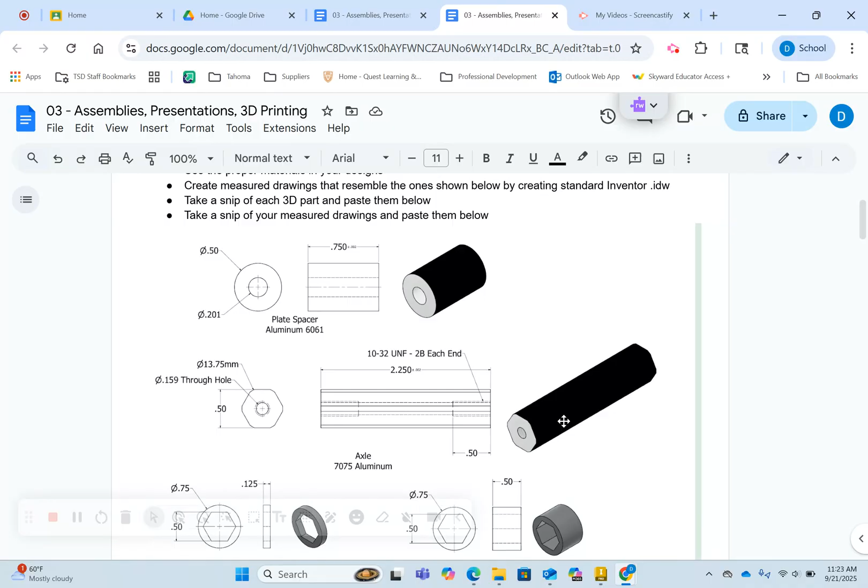Going to Inventor, we're going to go File, New, create a standard Inventor part, and go Create. First thing I'm going to do is make a sketch and then put a hexagon on that. So under the rectangle, dropping down, you can see the polygon. The default polygon that it gives you is a 6-sided polygon, which is a hexagon.

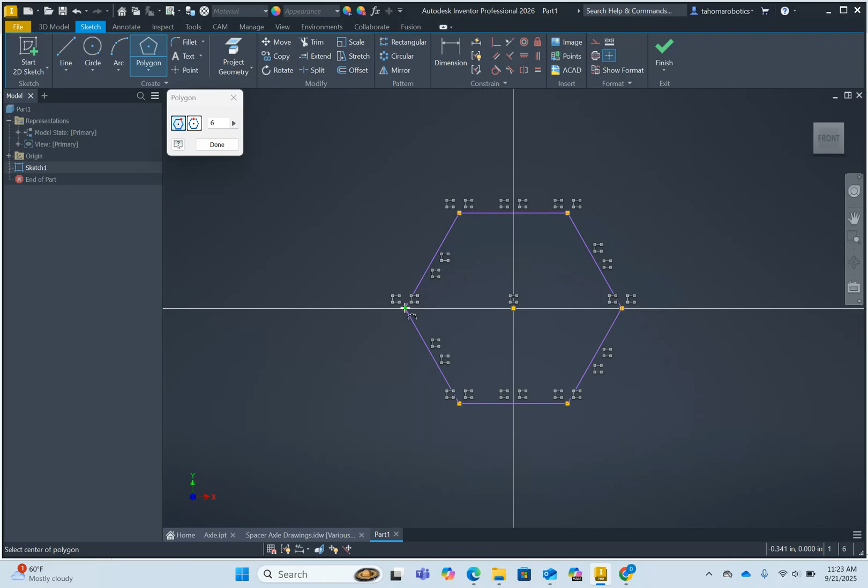We can dimension from flat to flat at a ½ inch. The reason why it's not fully constrained is because the vertex can move, and so I recommend just making one of the vertices aligned with the x-axis. Now that I have that, I'm going to make a circle to represent the hole in the middle, 0.159.

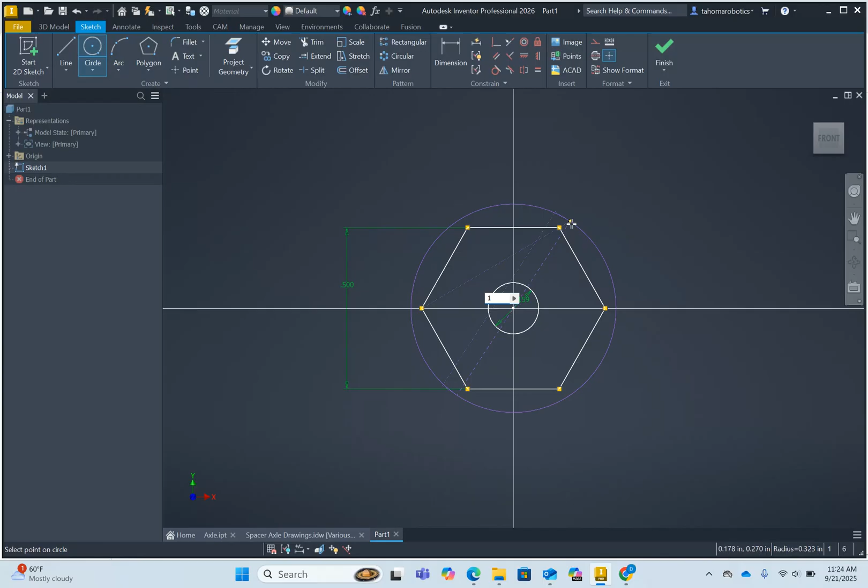And then I'm going to make another circle that is 13.75 millimeters. So if you just type in mm, it will make that millimeters. It will show up as the decimal equivalent at 0.541, but we can always go back and double click and you can see that it is in millimeters.

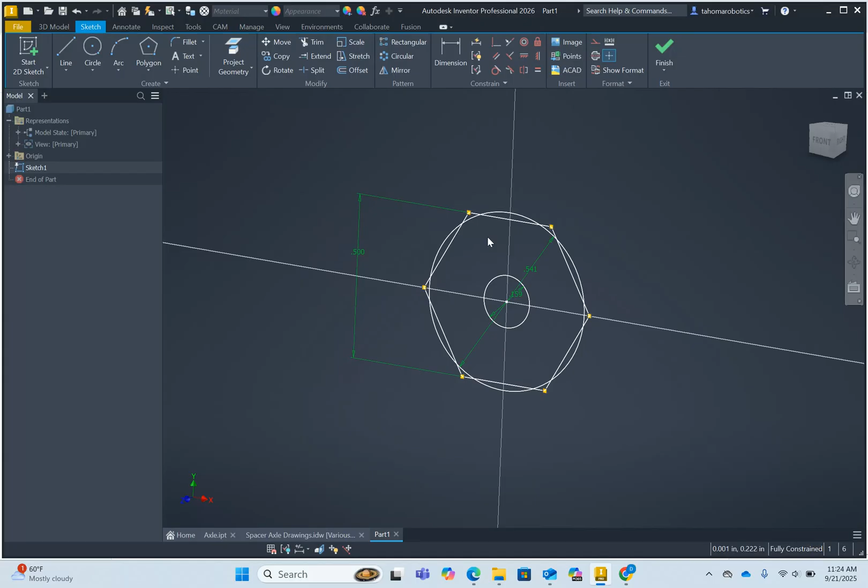So now that I have this, I'm just going to extrude the portions that I want. Basically, I don't want the entire hexagon. I want the vertices cut off with that rounded part. And then I'm going to just do a symmetric extrude at 2.25 inches.

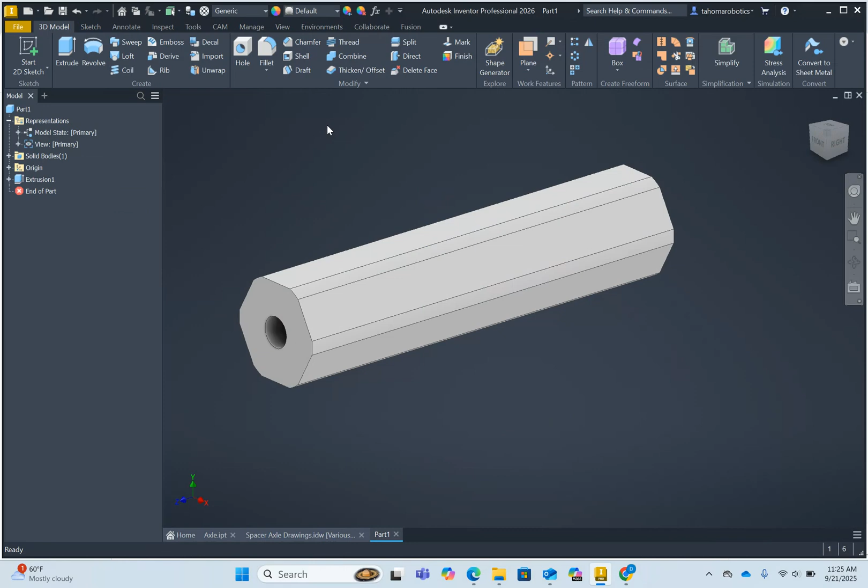So now that I have that shape, the next thing I'm going to do is just add threads on each end. There's a couple ways to add threads, but since this has a hole all the way through, the easiest way is to add the threads after the hole is made. And so we're going to do threads here, and I'm going to just click on this edge here. You can see that it gives me an arrow.

What I want is the size. I want a number 10, and then I want 32 threads per inch. This is a 24 threads per inch. The UNC stands for Unified National Coarse, so 10-24 would be coarse threads, and then 10-32, or 32 threads per inch, would be the fine, the Unified National Fine.

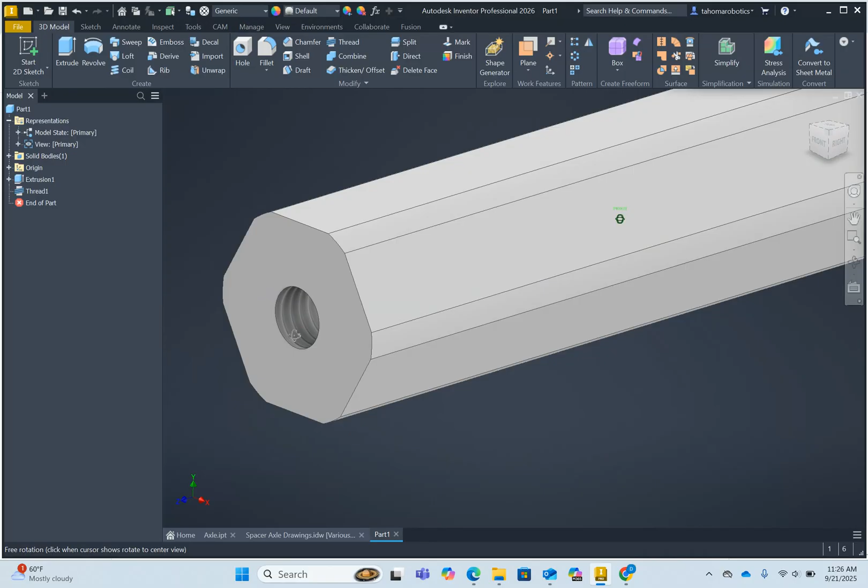We want the depth to go a ½ inch, and the default threads are right-handed threads, and almost every time that's what we're going to do is a right-handed thread. There are occasional situations where you do have threads that are the other direction, or counterclockwise, and require special screws. Hitting OK there, you can see that the threads go halfway there.

Now it doesn't let you mirror these threads, so I'm just going to need to do this to the other side. So I'm going to do threads, click on this side, notice the arrow is going that way. Need to change this again to number 10, 32. The default depth is a ½ inch, and it's right-handed thread, so we'll be able to hit OK.

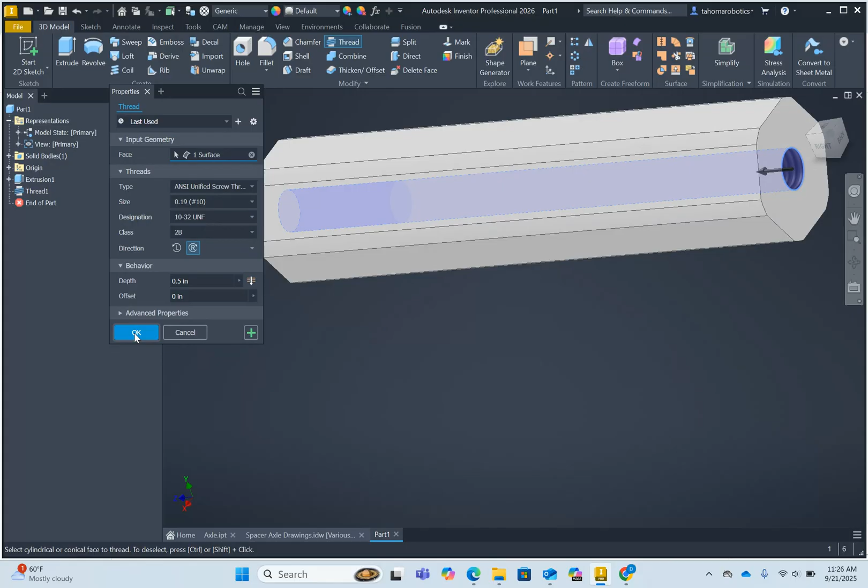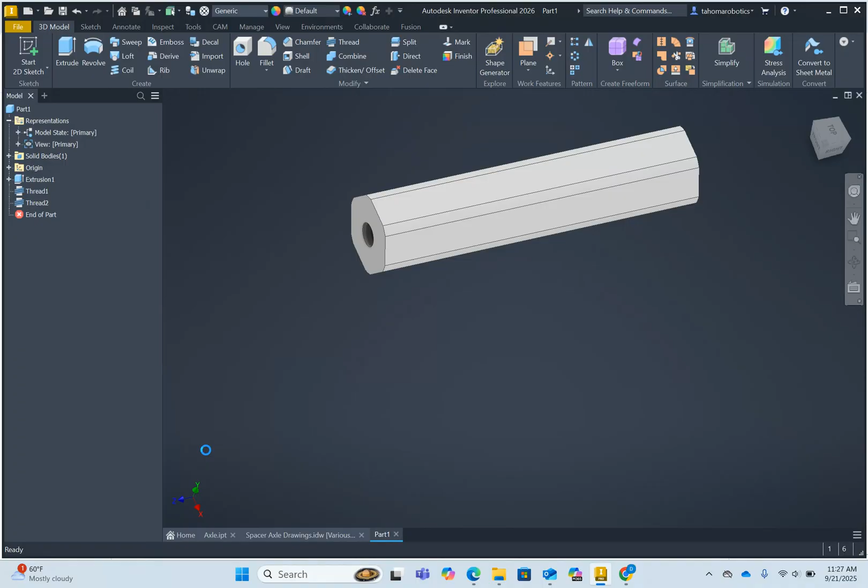Now that this is done, I can go and choose the material. Notice the aluminum 7075 is not an option here, but if you change the Inventor material library to Autodesk, we should be able to find it. All these different types of aluminum. We're going to go here, aluminum 7075. It does change the appearance.

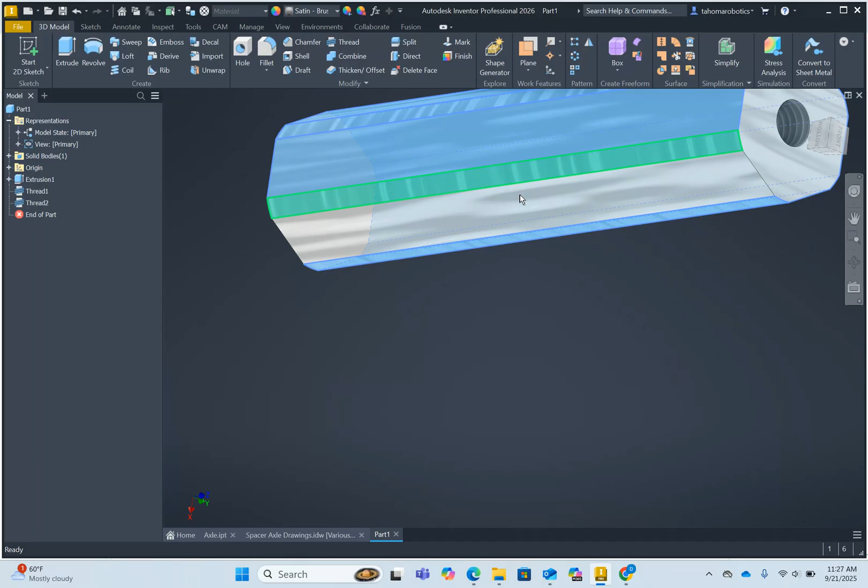What I'm going to do is select all of these edges here with a control click. Basically, when we purchase this material, it's anodized black, and so we're going to change this color to anodized black. On this side, it's cut off, and so it would be as what aluminum would look like, and so we'll leave that like it is. And then there's different types of black.

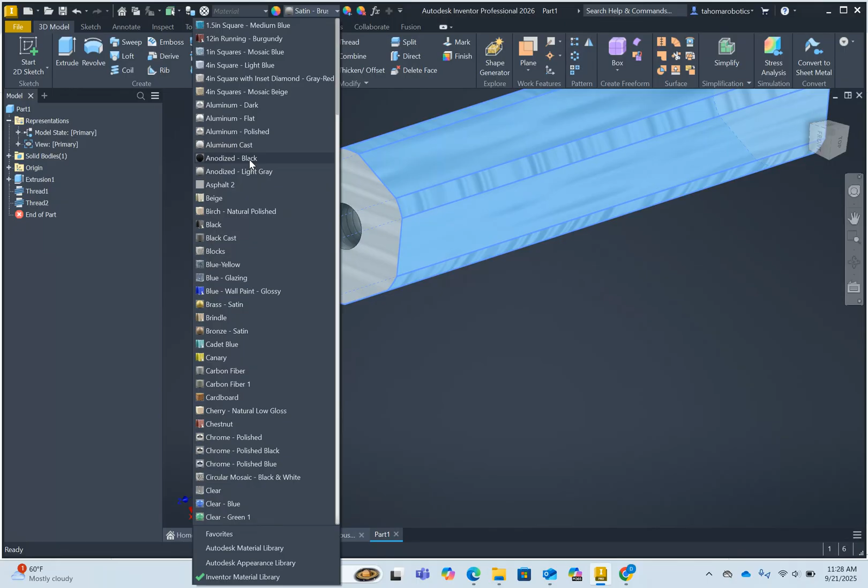There may be an anodized black up here. I think there is. Okay, so we can go up, anodized black. So you could leave it like this. You could also, if you don't like that brushed look, select both of these and change the view there. Let's see what options they have.

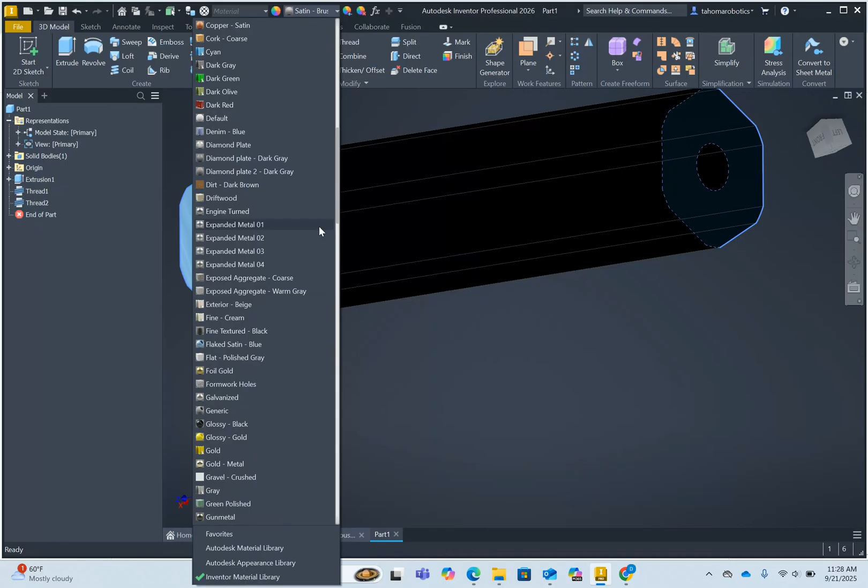So if we go here, the satin brushed, I can change it to, I think there's like a flat aluminum. Again, scrolling to the top, aluminum flat. That's typically what I do, but you can keep it at the brushed.